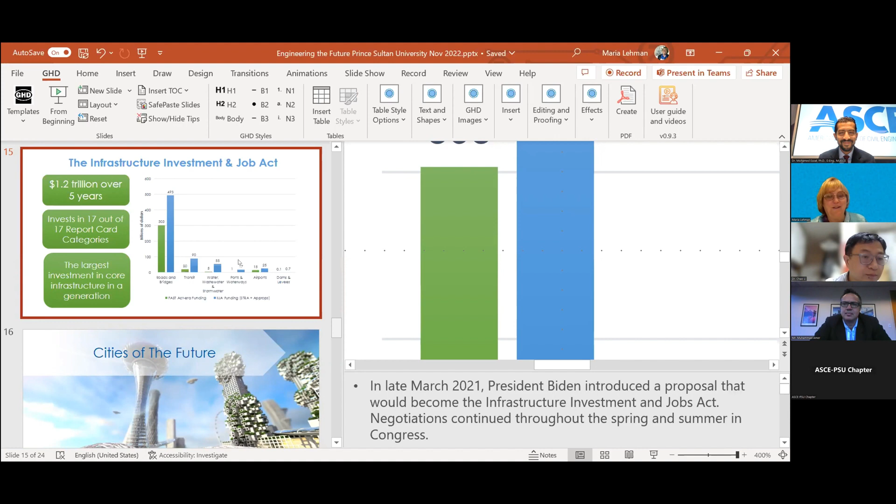So we're very proud of that, but we have to deliver. Now we have to deliver. We've been complaining about not enough money. Now we have to make sure we do the right things.

So part of our future world vision, just like we did with Building Big, Dream Big, a few years back, we are doing the same kind of rollout as far as going to science museums. And this is something that has global potential as well. So we signed an agreement with the same company that helped us when we did Dream Big, and I laugh and call this Dream Bigger.

We're taking everything we're doing with Future World Vision and embedding it into a full-length IMAX feature film, along with hands-on activities for middle school students worldwide to participate in. You can find Dream Big on social media, and you can even watch it on the plane with Alaska Airlines, for example. It's not just about outreach and Future World Vision; it's also about getting students already in programs excited about the future. But it's also for practitioners like us to have a community of practice where we can question and have an open dialogue about how we might handle issues in the future.

We're underway now, still in beta. This will be available at our convention in Chicago next October, finalized as a platform for Mega City, as well as the IMAX movie for next year. We're really excited, but you can download it now and use it as a tool. We've actually done curricular activities around it for undergraduate civil engineering.

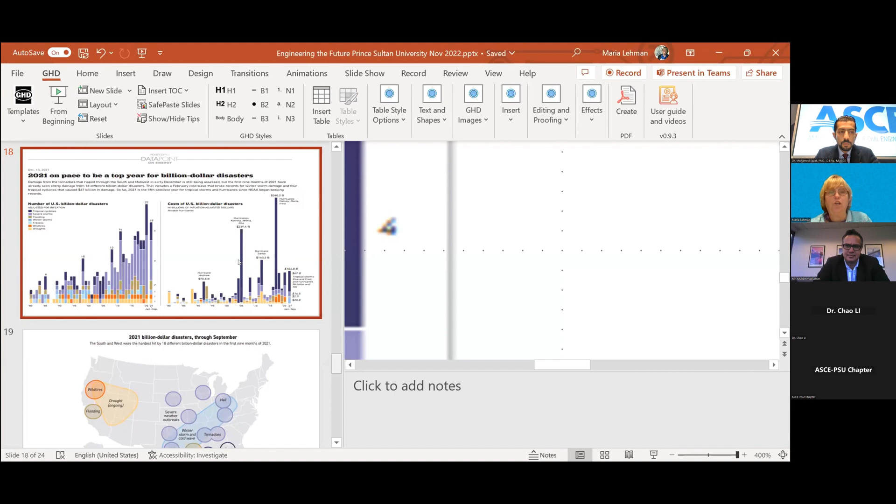We talked about the bipartisan infrastructure law and climate change, so we have to have both internal and external communications. Just to give you an idea, looking at the U.S. model last December, we had 22 separate events that each caused more than $1 billion worth of damage in the United States, and 2020 before that was the record. This year alone, Hurricane Ian, which hit Florida, is anticipated to cost somewhere between $40 and $60 billion. We're talking huge numbers, and we have to do better.

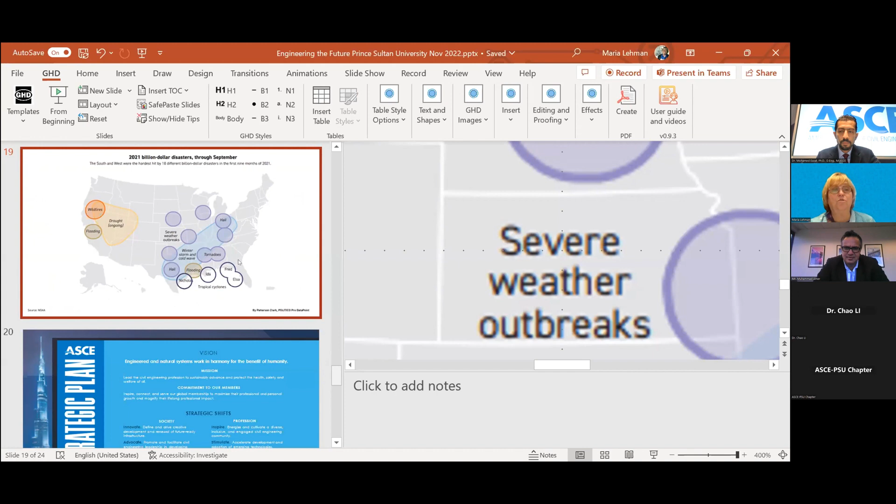This is kind of where the disasters were and the types—everything from too much water to severe drought depending on where you are. We're seeing flooding, wildfire issues, tornadoes. Looking at all these changes, I'm very proud that we charged a subcommittee of our Strategic Advisory Committee to work on a new 5-year strategic plan, because while our overall vision and mission was close to what we needed, everything changed from a strategy and tactics standpoint. We now have two pages on our website, very simple, about what we expect to do in the next 5 years.

Finally, a little bit about what we're doing on the public leadership side—I'm urging everyone to step it up. As mentioned, I'm on the National Infrastructure Advisory Council for the president regarding how we deliver better, faster, cheaper. The summit they had, just over a month ago, focused on being on time, on task, and on budget. We're looking at ideas from across the board on how to do things better, and it's been thrilling to have so many like-minded individuals who really want better, faster, cheaper engineering.

The last slide I want to leave you with: in Darwinian theory, it's not about the smartest or the strongest species, it's about who adapts best to the situation they're given. I think engineers are trained as problem solvers, so we're in a great place to lead on worldwide problems relative to society. We have to get comfortable with being uncomfortable. I think we're going to have questions at the end.

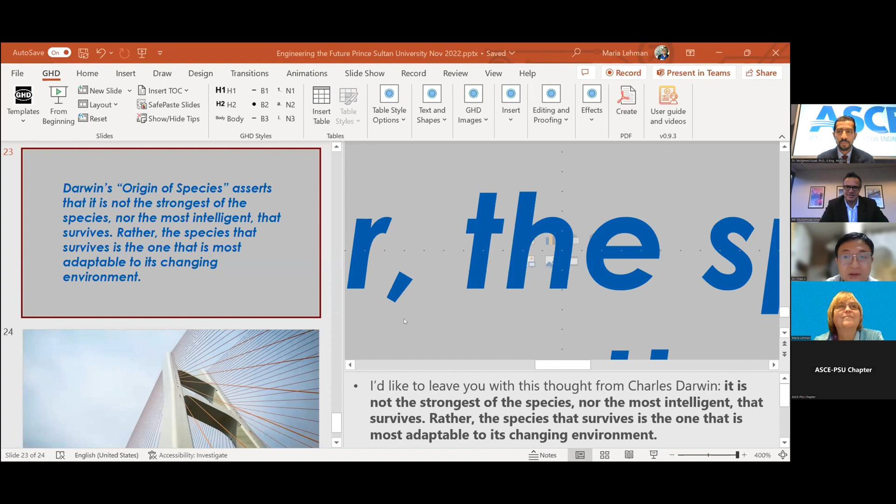Can you see it okay? Yes, full screen? Very well.

So my topic today is mostly about sustainability, but I want to echo what the president just said: we want a smarter solution, cheaper and more sustainable. Some people may think sustainability and resilience appear to be something extra, so I want to give our students, since we have a lot of students here, a bit of an example of what it means for a real large infrastructure project.

So here are some photos that I recently shot in Hong Kong and the neighboring region. You can see even in a very developed area like Hong Kong, civil engineers always have plenty of work to do. So if I start from left and go from top to bottom, you can see to the very left is...

Excavation, supported excavation - you have the struts and the sheet pile wall supporting the excavation. In the middle is roadworks near the center, very central in Hong Kong. And to the right is a renovation project for an old style cinema, covered by this green temporary works.

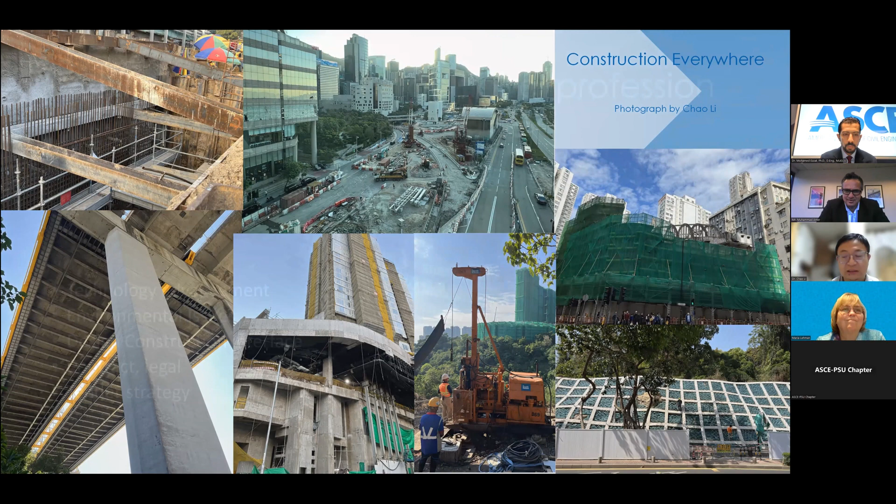So I just want to echo that civil engineers are always making positive contributions to society, no matter where you are.

And then one of the arguments I want to make is that civil engineering - at least when I was in university, more than 20 years ago - you always considered it as a traditional profession. Although in the past 20 years a lot of things have changed, especially the use of computer methods in civil engineering, in the last 10 years even more technology advancement has happened.

And we have ever more severe environmental problems, and a lot of constraints and limitations for all our projects. Also the interface issue between design and construction has become more and more severe. And as a contractor or as a designer, you've got to be aware of the contractual, commercial and legal issues.

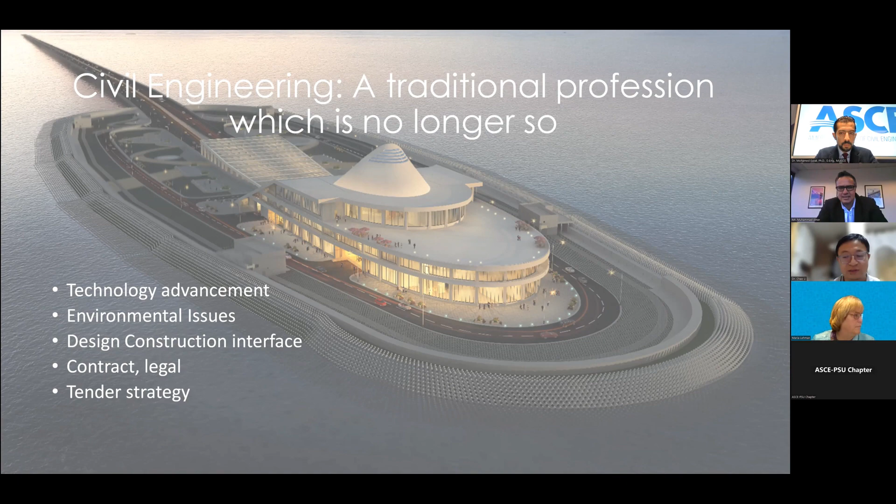And particularly in terms of tender, how the industry can overcome the lowest bid issue, which is causing a lot of problems for our industry - that's a problem almost everywhere.

So now let's take a step back and think about the characteristics of large scale infrastructure projects. I think one of the things is it is more than ever multidisciplinary. It has architects, civil engineers - including structural, geotech, transportation - environmental engineers, and MEP, which is mechanical, electrical, and plumbing. So in construction projects, all of these engineers work for civil engineers - basically we are the leaders.

And for large infrastructure projects, you also have many different work fronts, a lot of procedures, complex construction sequences. In terms of design and construction, sometimes you have to work in a very densely populated area - no longer in a place where nobody lives - many times you work with constraints. And of course for large projects you need a lot of people, a lot of plant, longer duration, and high uncertainty. So all this makes our jobs a lot more complex than before.

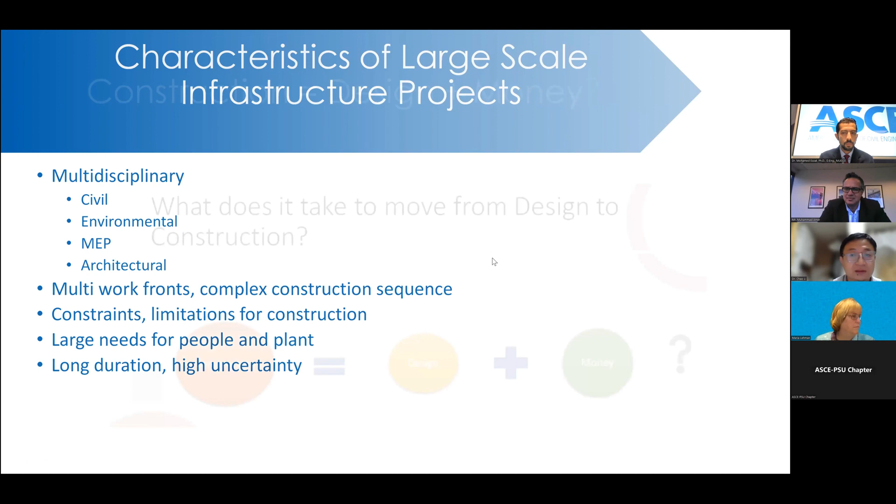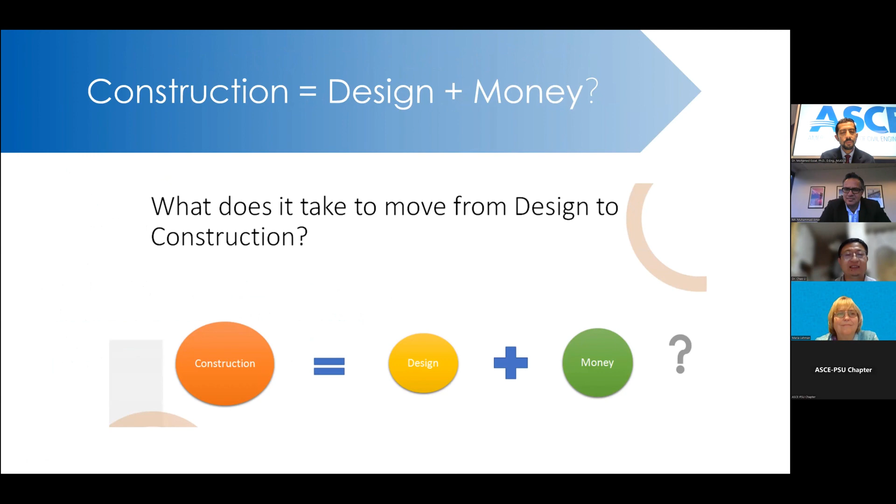One of the questions I want to ask our students is, what do you think, is this equation true? Is construction just design plus some cost, some funding? So let's reflect again about what is design and what is construction.

Design, most people know, means how the thing is supposed to look. We broadly divide design into permanent design and temporary works design. Permanent design means the final condition - it may or may not involve any contractor, there's a designer or consultant who finishes this permanent design. But temporary works design normally involves a lot of participation from the contractor, because the contractor has to figure out how to do it.

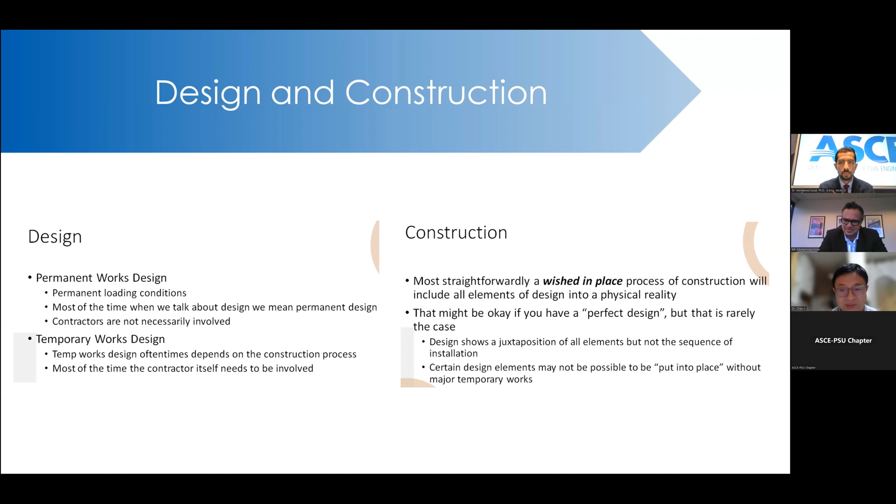Most straightforwardly, people would think construction is magically changing the design drawing into a three-dimensional reality. But that's rarely the case, even with a perfect design, because the design in the narrow sense simply shows a list of all the elements you want, but not the sequence. Many design elements cannot be put into place without major temporary works. For instance, if you want to build an arch dam, you can't just put a piece of the element there - you have to work it out with the soil, the rock, and the temporary works.

In terms of design optimization, if you've studied construction management, you've probably seen this chart. The horizontal axis is the project time, from the start to the finish of construction and into the start of operation. The vertical axis is the level of influence on cost. We can see that if you change the design at the very beginning, you have the greatest influence over the overall cost. But as time goes on, particularly after entering the construction stage, the level of influence is greatly reduced.

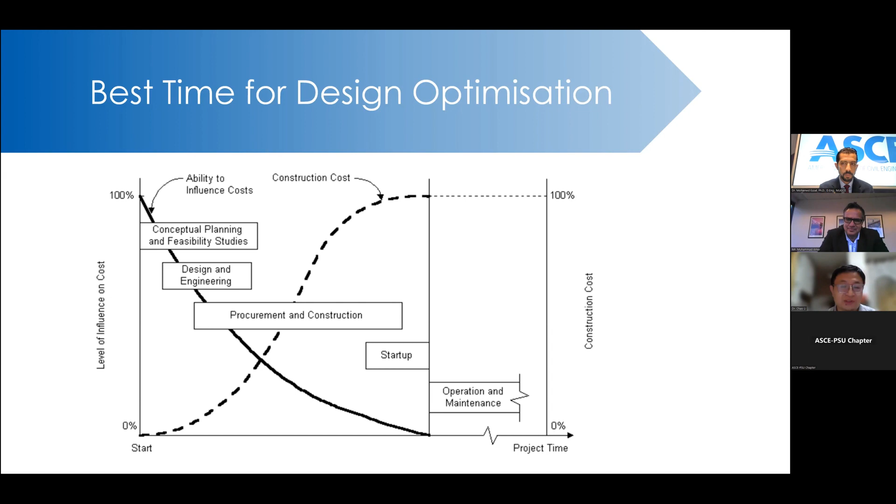Why is design optimization always possible? Why can't we do the job perfectly in the beginning? I want to bring a few perspectives. Firstly, from the geotechnical engineering part, we normally rely on ground investigation data. There's a lot of uncertainty - you normally have a small amount of ground data before you get the job. After you get the job, particularly for large infrastructure projects, you get like 10 times more data than before construction. So there's no reason why you shouldn't make use of that data and make your design better.

The third element I want to point out is monitoring data. Nowadays our construction site is a little bit like having a lot of eyes watching the site. We're collecting a lot of information on water pressure, movement, and the response of the partially complete structure under loading. All this data can be used for further optimization.

How can we do it? For instance, in geotechnical engineering, it's possible to use big data technology to deal with the data, which we can show with an example a bit later. In the structural part, for wind load, earthquake load, and wave loadings, you can have more advanced analysis during the construction stage based on more information. Construction itself is a dynamic process, so you can do some further optimization.

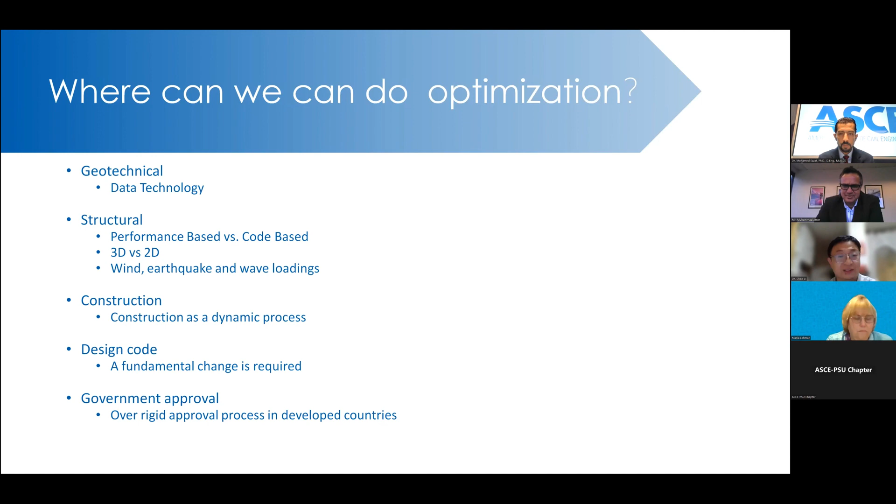At last, I want to mention the design code, which needs fundamental change to suit the current digital revolution - digital construction. The government approval process can also be further optimized. Here's one example: when I started working in 2003, in New York, I saw one of the engineers use this simple one-page calculation for a subway station.

Well, you can see it's a very neat calculation. Right now, not a lot of engineers are still familiar with this. Nowadays, many of these calculations can be done by finite element software more accurately, but we would still need this hand calculation to calibrate our computer simulation.

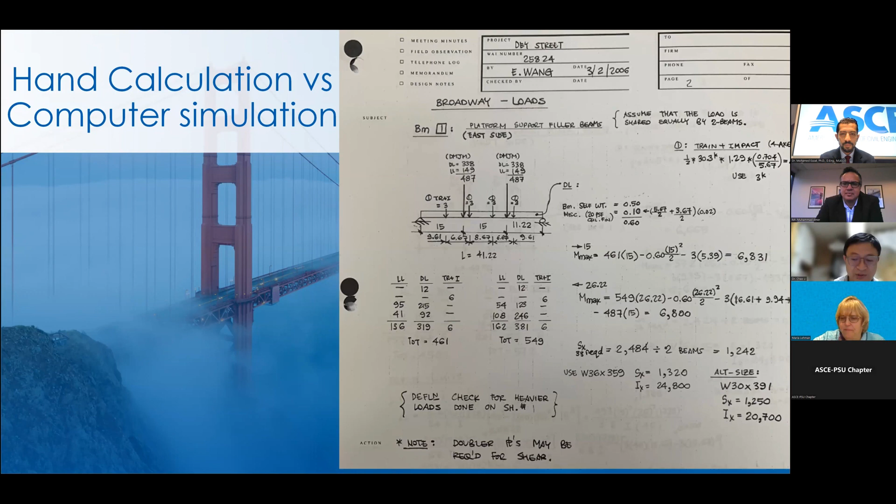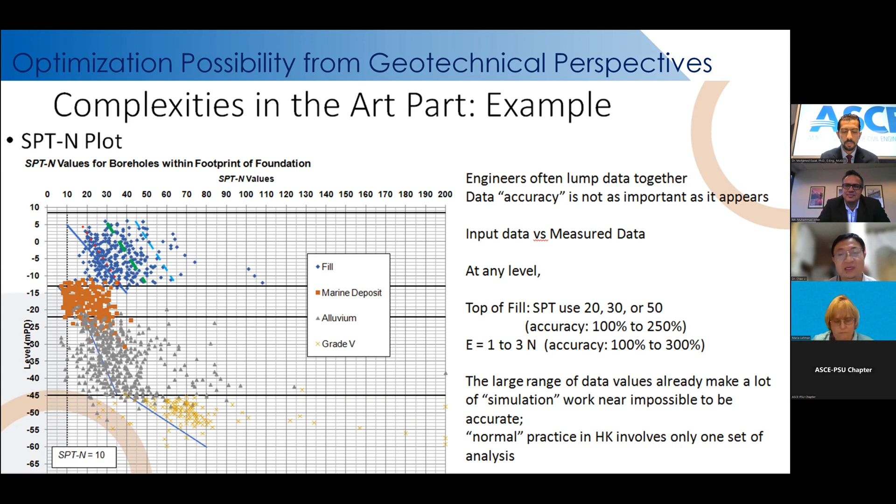But at this moment, even in Hong Kong, a very developed area, people still use one single set of analysis to do the design. You can see this is why the design can be optimized - a lot of uncertainties are involved.

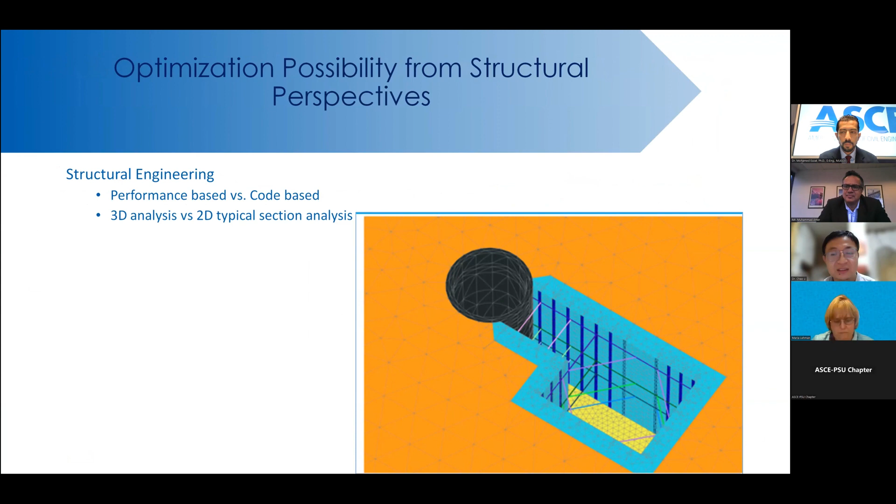In terms of the structural mechanics part, this shows the excavation lateral support. We have a circular shaft and the ERS to the right. For this kind of geometry, if you still just do 2-dimensional analysis, you're going to be quite conservative, because if you fully consider the 3-dimensional interaction between soil and structure, you can have on average about 20% to 30% savings.

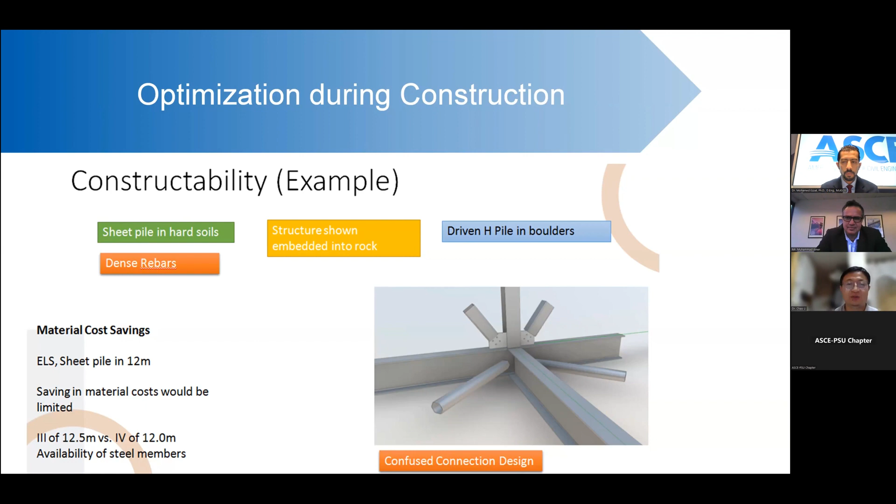There are a number of other things - for instance, people may choose the wrong type of structure for the soil conditions. If you assume there's hard soil, you would use a pre-bored pile, but if you instead use a driven H pile, on paper you'd save money, but in reality, if you encounter a boulder, you still need to bore through it and then install the driven H pile, which will cost more than the socket H pile or bore pile. So all these things you cannot know basically before construction starts.

The third point, another point, is the building code. In some areas of the world, the engineer normally says, okay, I'm doing the design based on the code, but actually the code has a lot of options, whether ASCE code or Euro code. If you are willing to do more sophisticated analysis for cost saving, you can - by spending a little bit more on analysis, you can probably save a lot of money in terms of overall cost.

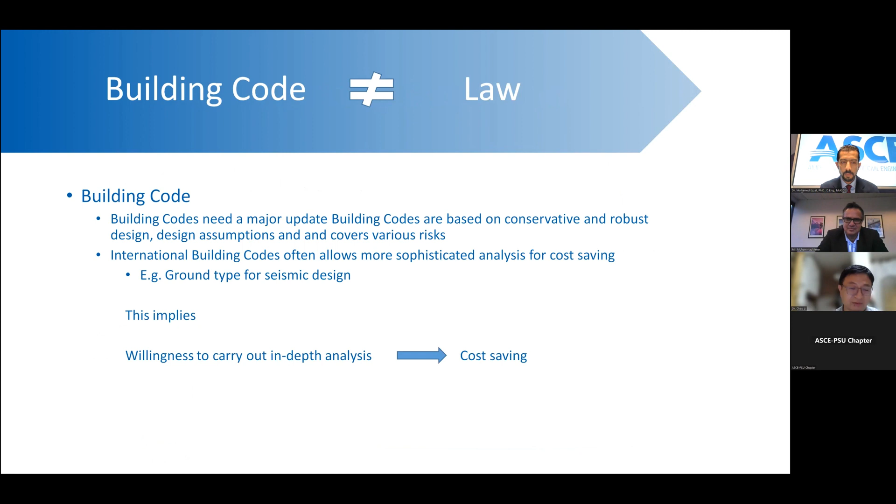So the design approval is one big issue as well. In Hong Kong, we have a very rigid design approval system. Even a method not allowed by the authority, even if it's a sound practice, probably cannot get approval. And the approval itself takes a lot of time.

Basically, as we're region 10, I'm from region 10, which covers a lot of countries with a lot of governments, so different codes are used. We need to be aware that design approval in one country doesn't mean approval in another. So we need to be careful about that.

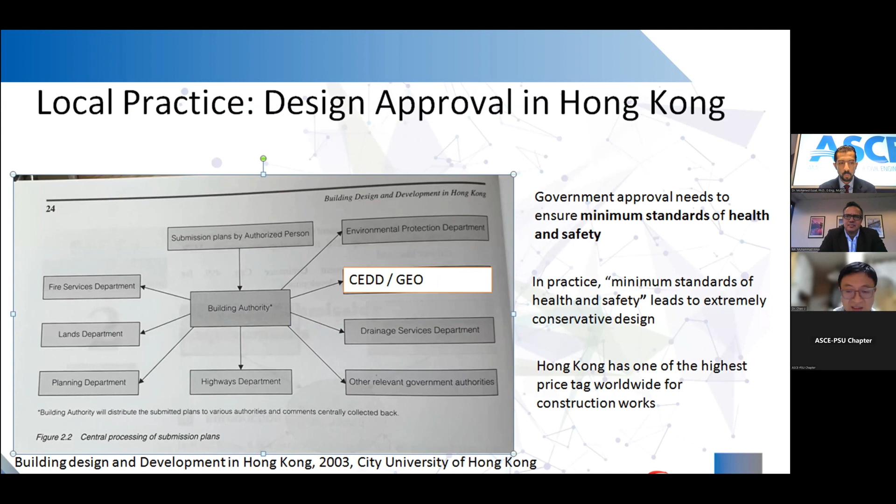In Hong Kong, we have a building authority which collects all the different departments, like the fire service department, the highway department. All these departments come under the umbrella of the building authority, which does the design approval. You can see that's why they are executing these laws rather than letting the engineer decide many of the design elements. That's one of the problems why Hong Kong is very expensive in terms of construction cost, which is not very sustainable.

Overall, how should we design? Think about sustainability and resilience in relation to design. I think we've got to look at the overall life cycle, and we should try to reuse as much construction material and plant as possible, which I'll give an example of on construction material, and then think about how we can do carbon reduction.

One of the important things is people, because we need people who are in charge of design, construction, and management. All these people need to work together to ensure common understanding is reached, to avoid waste during the design or construction phase.

New technology will help with that, including particularly building information modeling. At this moment it's pretty much still a graphical tool, but the potential is there, and many important infrastructure projects have already used BIM to reduce waste. We can also use Internet of Things, robotics—all of this will help us reach our sustainability goal.

One example: recently in Hong Kong we completed one of the major reclamation works of the Hong Kong International Airport. We reclaimed about 650 hectares of land.

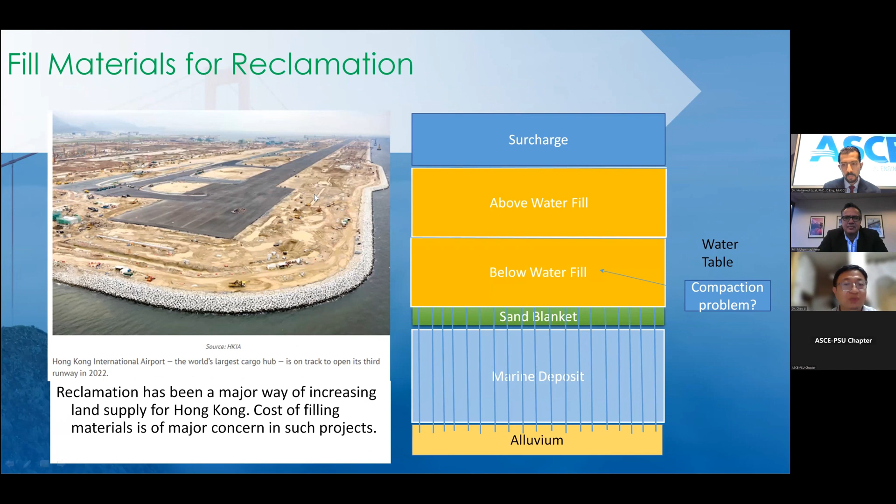A further enhancement would be, if you go back to the picture, we have a runway, and only the runway is very strict in terms of settlement performance. So if the designer and contractor can work together to make sure the settlement is controlled within the runway, for the rest of the area you don't need a very strict settlement criteria. If you can do that, you save a lot more money and make the whole thing more sustainable.

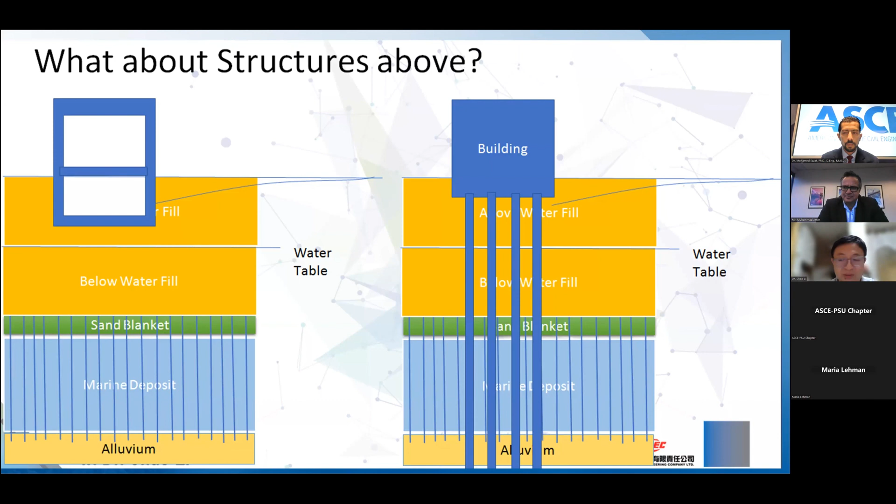Time is very limited, so in terms of the superstructure it will be similar. You can build a building and put it on piles, or you can work out the stress balance. So if you build a very large basement, your building probably will not cause additional settlement. This is a little bit too complex to explore at this moment.

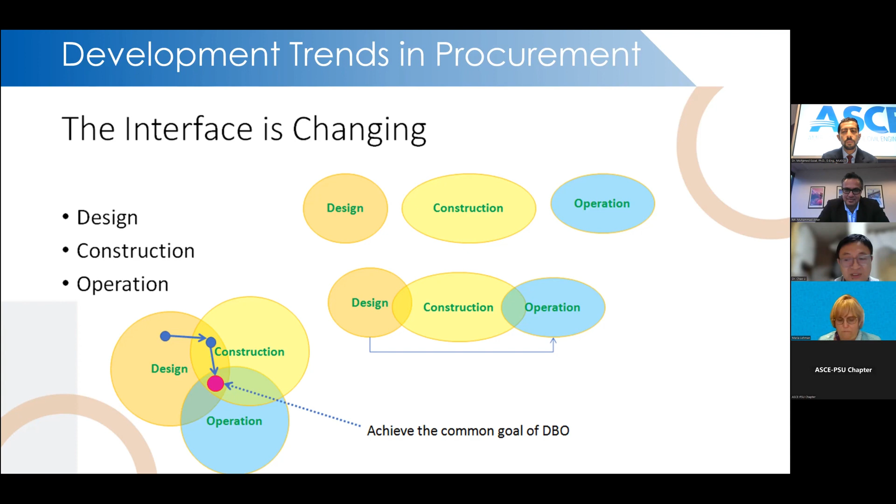But we need to know that the interface is changing. Before, we had design, construction, and operation very separated. Right now, design and construction have some interface, construction and operation have some interface. In the future, or probably the future is happening now, we need to find the optimal region where design, construction, and operation find a common goal. Only if we enter this region can we call our infrastructure sustainable or a cheaper solution.

So we'll move on with the slides. As I just mentioned, how do engineers get ready? I think we need to think about having the right vision, the open mindset, the willingness for collaboration, and the necessary skills. Most importantly, we need to have understanding and leadership.

ASCE is promoting the view of civil engineers as the right leaders. During real construction projects, all of the engineers are working for civil engineers. Normally, at least in Hong Kong, the civil engineer will lead the electrical engineer, mechanical engineer, and all the other engineers work together with civil engineers. So that's why we need to be in the leadership role.

There are a number of huge infrastructure projects in the Greater China region. I'll just mention the names, I cannot explore all the details, but if you are interested you can find out a little bit more. This is the Three Gorges Dam project, and this is the Hong Kong-Zhuhai-Macau Bridge Link project.

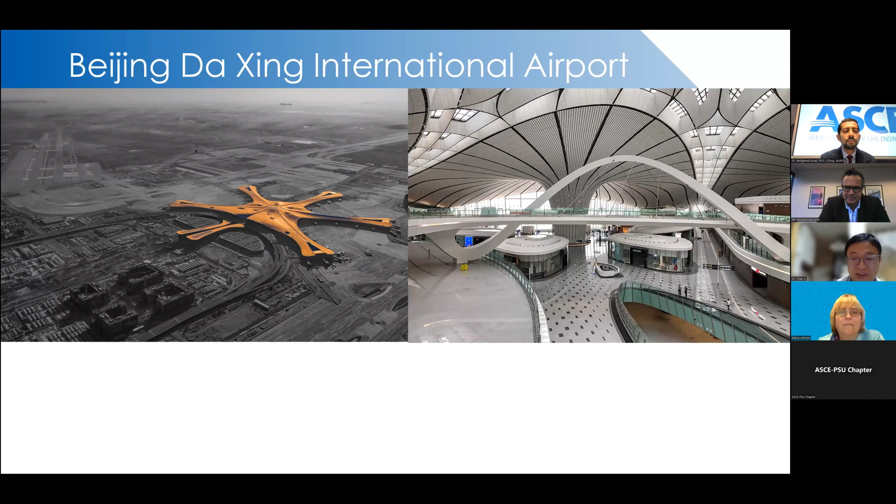This reclamation project, I was the design manager for this project. We reclaimed about 650 hectares of land. This is in Beijing, the new airport, the Daxing International Airport. And there is another, more than 35 kilometers long, the Shenzhen-Zhongshan Bridge, which consists of a bridge, immersed tube tunnel, and a man-made island. All fascinating projects, if you're interested you can find out a little bit more.

Finally, a few words about Region 10. Region 10 is actually another word for ASCE Global or ASCE International. We have presence in 24 countries in Asia, Europe, Latin America, Middle East, Australia, New Zealand.

And that's the mission already explained by Maria. ASCE has a vision for the engineer to be master builders and stewards of the environment, innovators, and managers of risk and uncertainty. Most importantly, it should be an invaluable network for lasting friendship. Thank you very much for your attention. I wish to build this greener future together with you by innovation.

Thank you so much, Dr. Chae Li, very nice presentation. I really like the manual calculation sheet. Actually, I still use manual calculation and always advise my students to double check the result using manual calculation. Thank you so much for presenting those very interesting case studies.

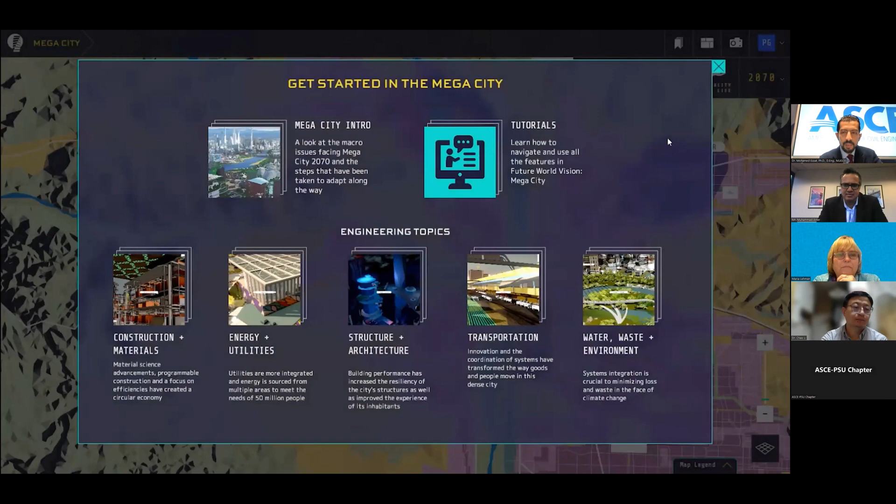After logging in and moving past the tours and tutorials screen, you'll be in the city view, where you will see a wide map of the city and the surrounding region. A comprehensive story of Mega City appears on the left. To see the map evolve over time, navigate to the year selector on the right and click through the other eras.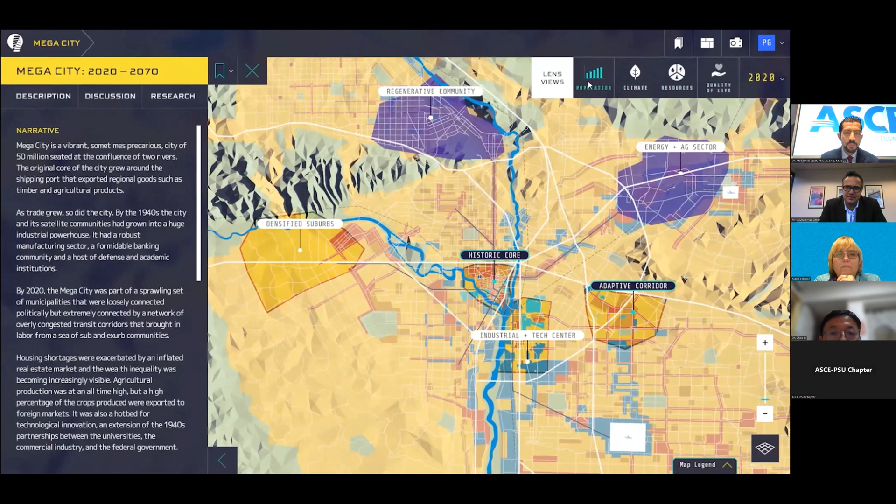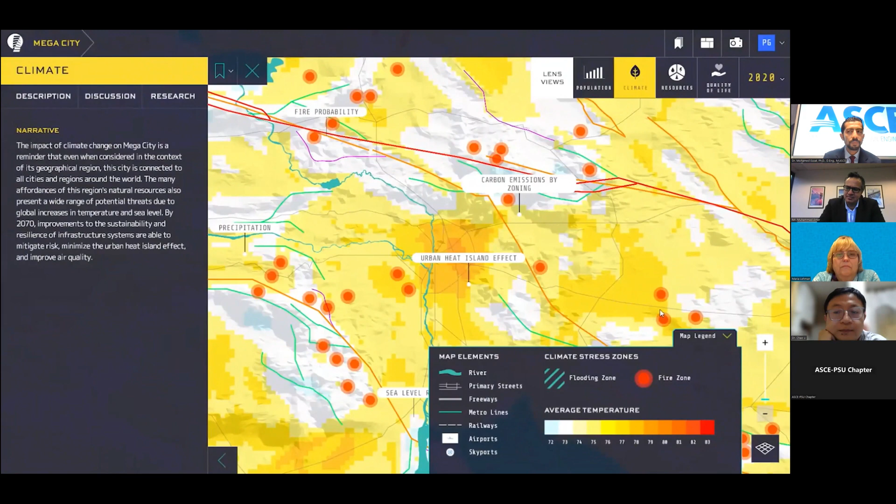An important feature of this view is the ability to see the city through several macro lenses. Clicking these allows you to isolate specific regional realities that shape the challenges and guide the innovations in Mega City. Refer to the legends to understand these lens layers, study the data that informs them, and read a brief overview of each. When you're ready to move on, you'll see that 6 distinct districts are selectable. Click these to read about how they differ.

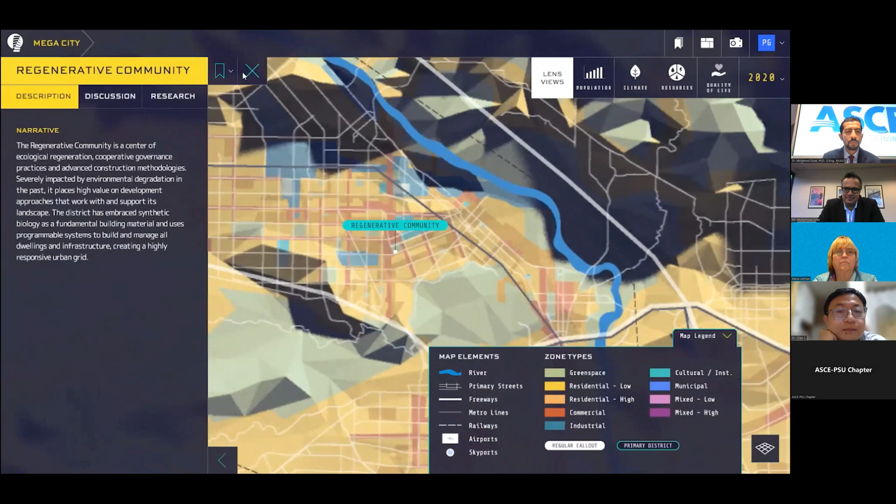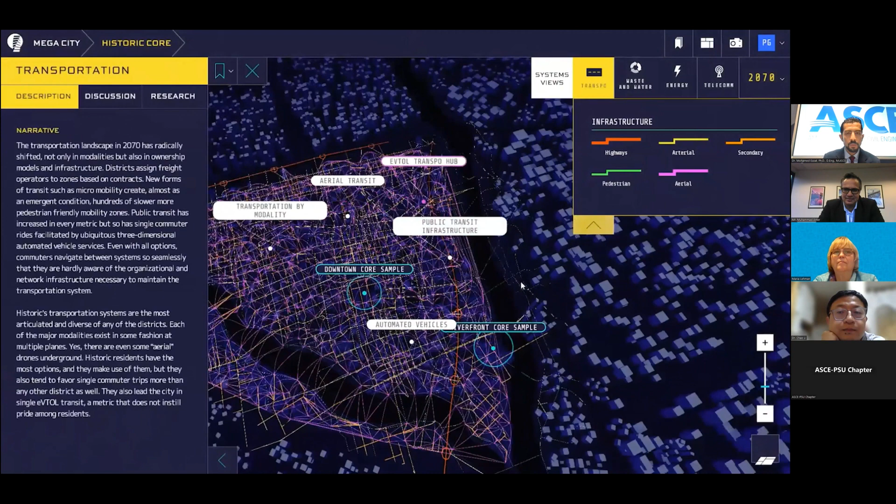2 of the 6 districts are more fully explorable. When you're ready to go deeper, click on either Historic Core or Adaptive Corridor, and those will lead you to those districts. Once the district view is loaded, you'll have several options to explore. First, the lens buttons have now been replaced by systems buttons, and this is the place to understand the systems of the city. Clicking through each, you'll see a new legend appear.

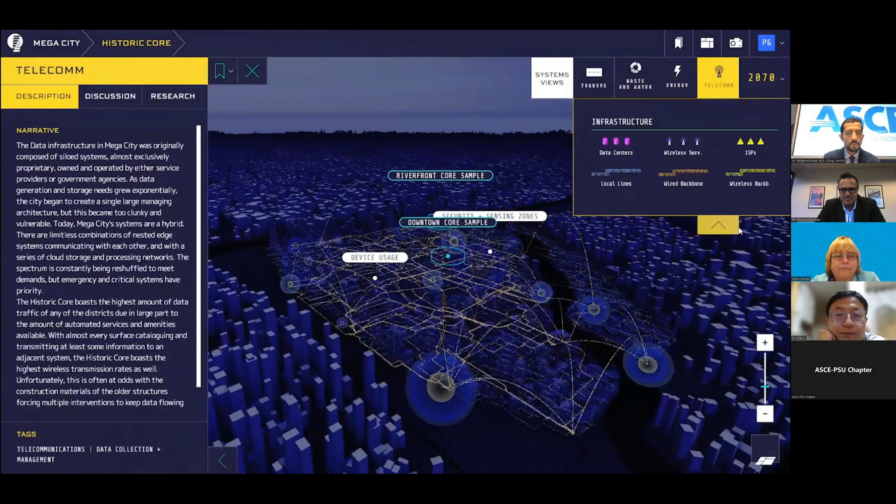An overview accompanies actual data driven by the population density, demographics, and energy and resource requirements of this particular district. Also in the district view are key landmarks crucial to understanding the wider functioning of the district and city as a whole. Rolling over the callout flags extruding from the landscape will display the name of that particular landmark. Click to explore them in more detail. Let's look at the energy substation. You can move in closer and read the summary of the landmark's function.

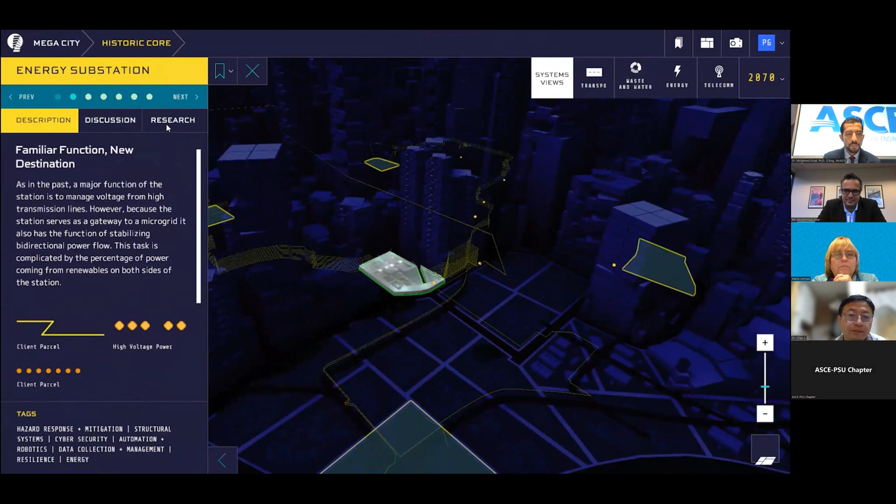Then you can click through the steps that illustrate the process in more detail while seeing the landmark animate to further clarify. When you're ready to leave this landmark, X out and you'll return to the district.

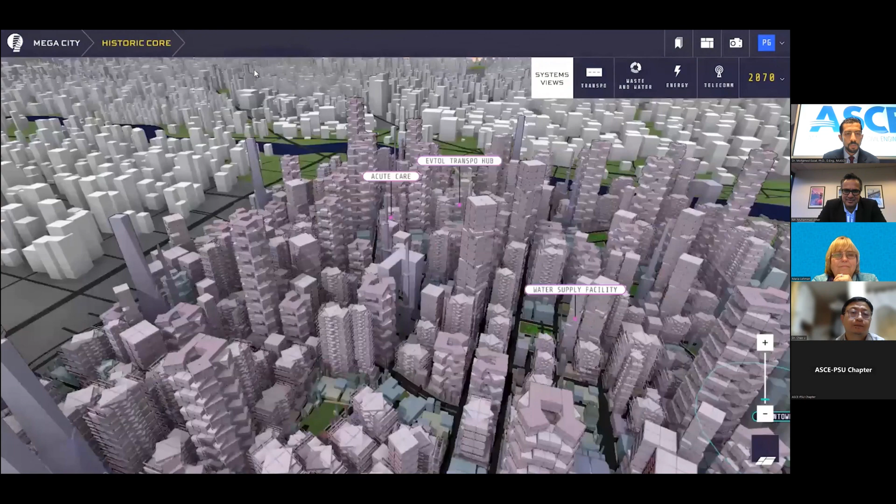The next thing to see here is what is called a core sample, indicated with the explorable dark callout flag. Think of this as a detailed cross-section, or a vertical slice of a few key city blocks. Upon selecting it, you'll notice that it's segmented into 4 distinct vertical layers. Selecting each, you can read the summary on the left and then click specific callout flags within those layers to take a closer look.

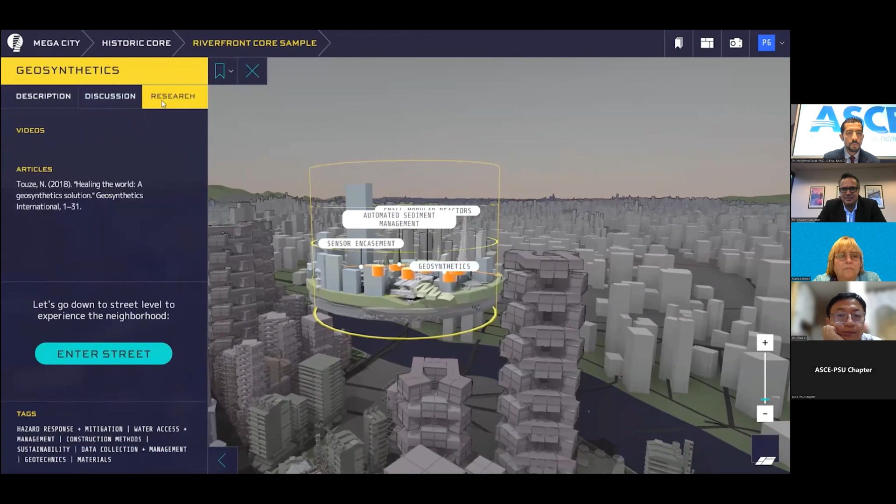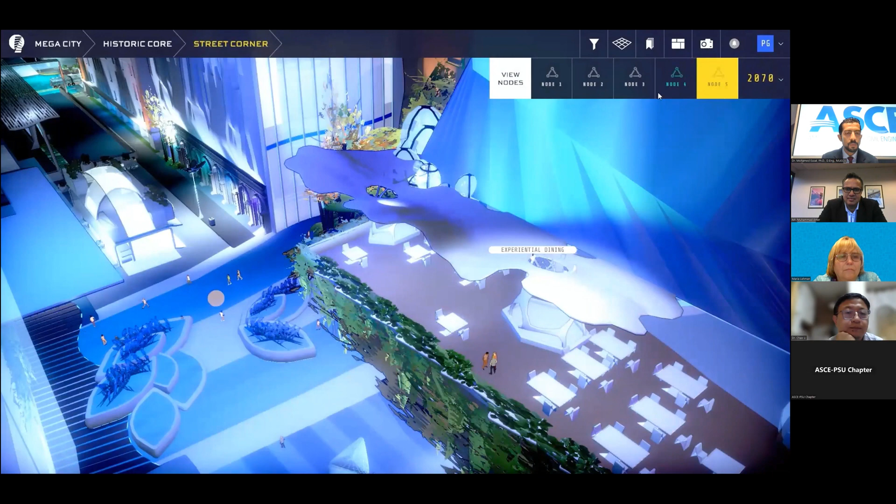When you're ready to move on, click Enter Street in the lower left portion of the text window. There will be a brief load as all of the elements of the street corner populate. Once they do, you'll find yourself seeing the city at a human scale, the streets bustling with activity. Using the various navigation methods - and for more on this, watch the Navigating Mega City tutorial video - you can wander or fly around the street corner. You can click any callout flag that interests you and zip to that spot.

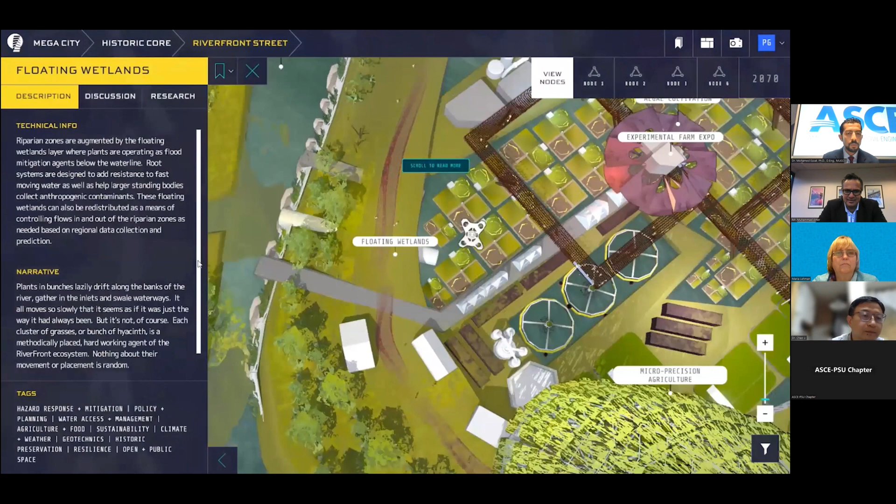Here you'll see 3 tabs. On the left, you can read the technical info to understand the engineering logic or explanation for this particular callout. Then read the narrative description, which explains how this item might impact residents in their day-to-day lives. The middle tab, Discussion, allows you to add your thoughts to the conversation, which in turn might spark colleagues to add theirs. Previous comments appear below, and you can reply to those as well.

Note that you'll have a choice to post your comments to all users, which is the default, or if you are a member of a private group, you can select that group from the drop-down menu here to keep your comment private. The rightmost tab is the Research tab.

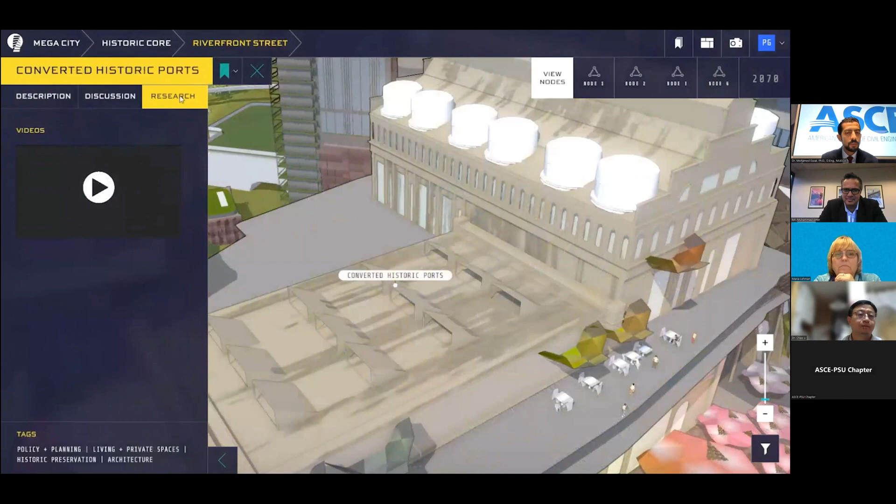Open this to find the research that informed or inspired the callout. It may be in the form of a video clip from an expert interview or citations for research articles. Bookmark the callouts you want to remember so they will appear in your library, making them easy to find later. When you finish with the callout, simply click X to close it and continue on your way.

Finally, there is a filter button you can use if you're only interested in seeing callout flags within a certain theme. You can find this button in the lower right corner. When you click it, a filter screen will appear with a few dozen keywords. Clicking the breadcrumbs or arrow-shaped banners at the top left of the application will help you jump back to any level you'd like to go, and you can continue your exploration from there.

One thing I would mention is, as you saw, this is a vast city. It is easy once you get into it - it is easy to get lost in the city. So the latest version that we have now available for download, you can actually enter the city and search for what you're looking for. So for example, if I'm only interested in highway pavements, or I'm only interested in architectural facades of the future, I would go and search for that.

And it will give me a list of every place where this is mentioned. And when you click on that, it'll take you straight to that point in the city. So you won't have to search for it within the city. Do check it out, do look at it, but let's very quickly - and I'll wrap it up very shortly. I know we are short on time.

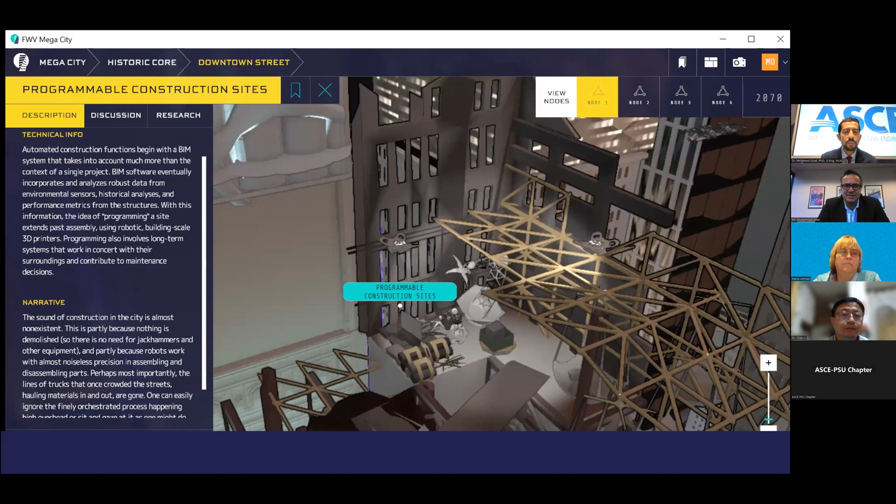The application - I'll start with application in academia. How do we educate civil engineers of the future, right? I'll take a screenshot of the desktop platform where I'm showing the programmable construction sites. Using that as an example, I know this is about sustainability and resilience - you could take any of the sustainability related elements and make that the focus. This is the slide, let's take that.

And here is a sample exercise 1. I'm not going to read through all of that, but just to say, this is an instruction to the faculty member: show a callout during a class and have an in-class discussion. So now the students are not using the platform - they're just sitting back and having an in-class discussion about the advantage and disadvantage of this idea.

In this case, it's programmable construction sites. Overall, good or bad idea, and the reasons why. Focus on the social, economic, and environmental impact of that particular idea. And that generates a discussion, and you see the characteristics of this activity.

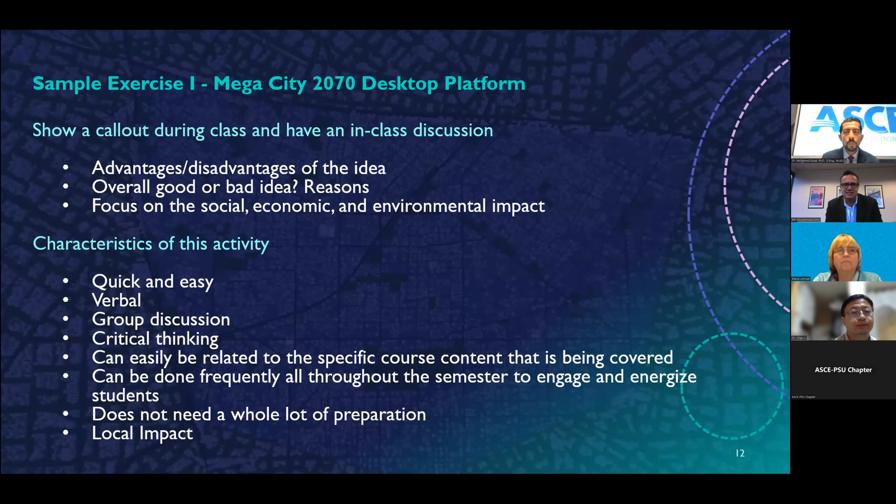It's easy and quick to put together, and it generates stimulation in the classroom. But in sample exercise 2, you're requiring students to actually get into the platform and provide a homework assignment for which students engage in a discussion on a particular callout using the discussion board of the platform.

As you saw in the demo, every product, technology, or process in the city has its research and other information, but also has its own discussion tab where you can have students engage in discussions around the advantages and disadvantages of that idea. The great thing is it has a global impact because everyone on the platform gets to see that, and you can have in-platform and off-platform conversations from it.

Sample exercise 3: ask students to pick a few callouts, 3 or 5. When I say callouts, it's one of those tags—process, technology, or product—ideally related to each other and relevant to the course content. Ask them to perform thorough research, news and research articles, to write a term paper and develop a class presentation, identifying current research on the ideas presented and discussing the feasibility of those ideas happening in 50 years. So you see that's much more in-depth—it's a critique and a term paper on what you're assigned from within the platform.

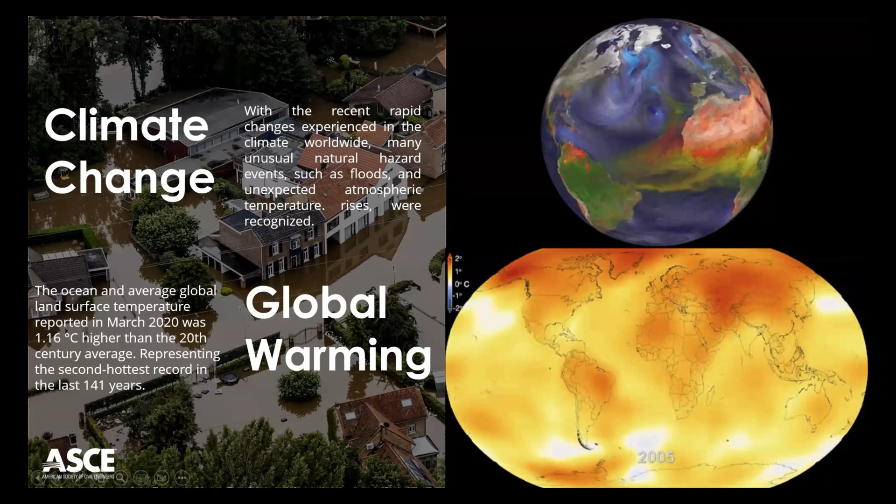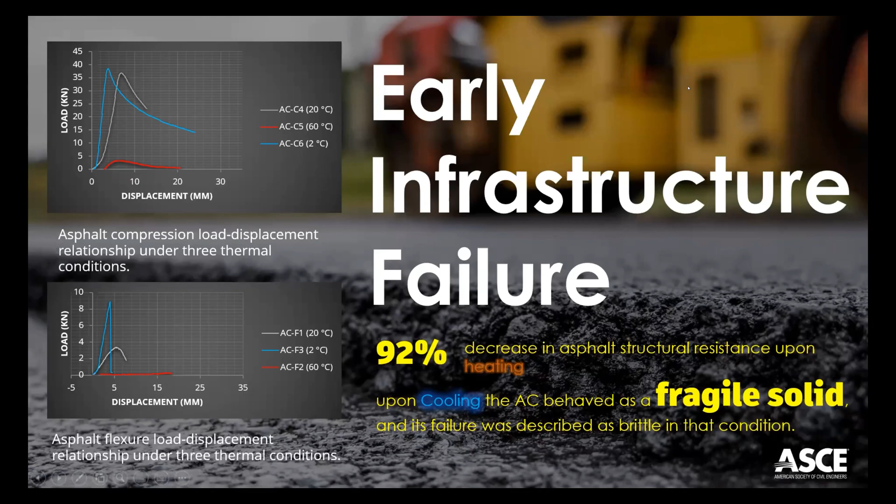According to our testing in our engineering lab, we examined the asphalt behavior under extreme hot conditions and extreme cold conditions, and what we found is that it loses up to 92% of its structural resistance upon heating, and upon cooling it's converted to be fragile and suffers brittle failure. For sure you experience one of those cracks nowadays, becoming more and more common in every roadway. Many types of cracks, damage, settlement and different kinds of cracks.

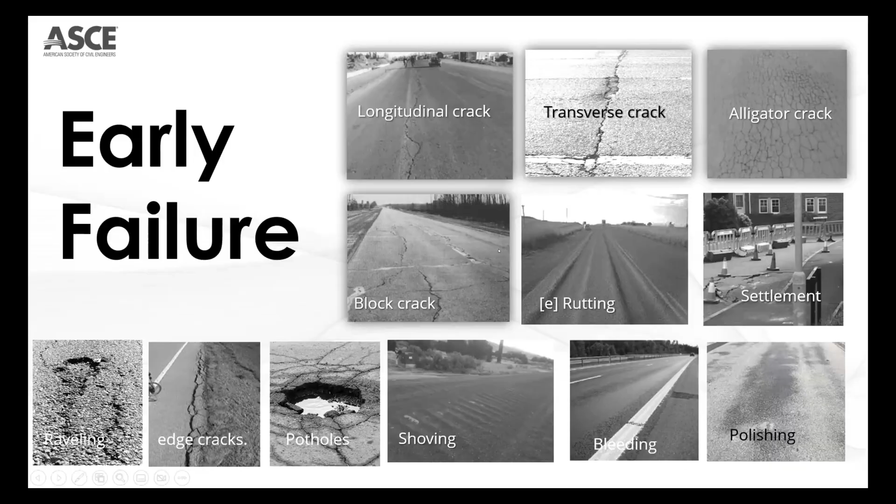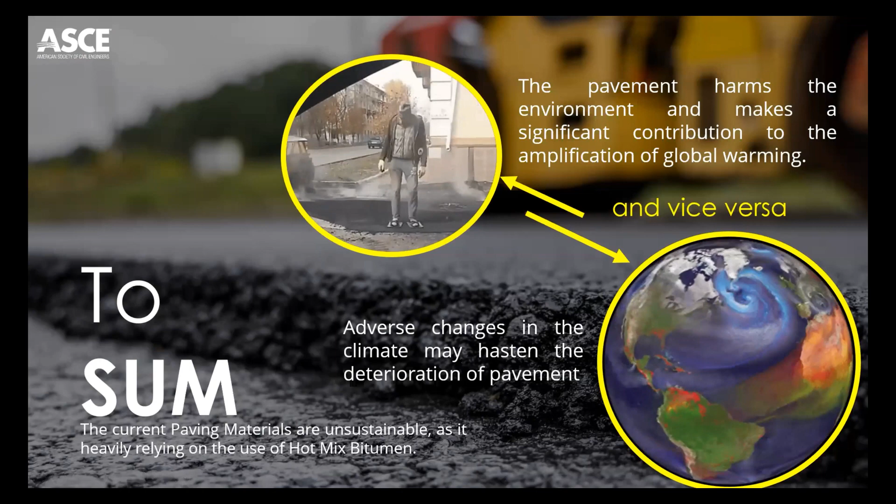On the other hand, the asphalt pavement is also contributing to global warming. Many studies show that it releases up to 300% more emissions upon being subjected to solar radiation. So to cut it short, asphalt pavement contributes to global warming and climate change, and vice versa, climate change affects and deteriorates our asphalt pavement, which is the major element in most paved and covered areas.

So what eco-friendly paving solution do we have for the near future? I will present here the solution that is very close to being applied much more widely.

First, one of the most promising solutions we have now is the bio-based asphalt pavement. This type of asphalt is mainly made of non-petroleum-based renewable resources. Most of those materials are bio-based, and it can be colored, which can reduce the temperature of the road surface and reduce the urban heat island effect.

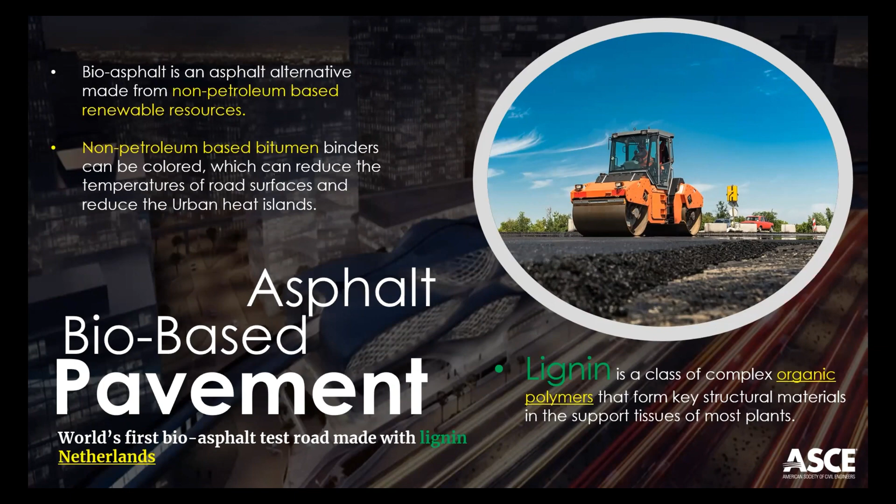In Netherlands, they already applied a full-scale experiment on one roadway segment. It was composed of lignin material, which is an organic polymer material.

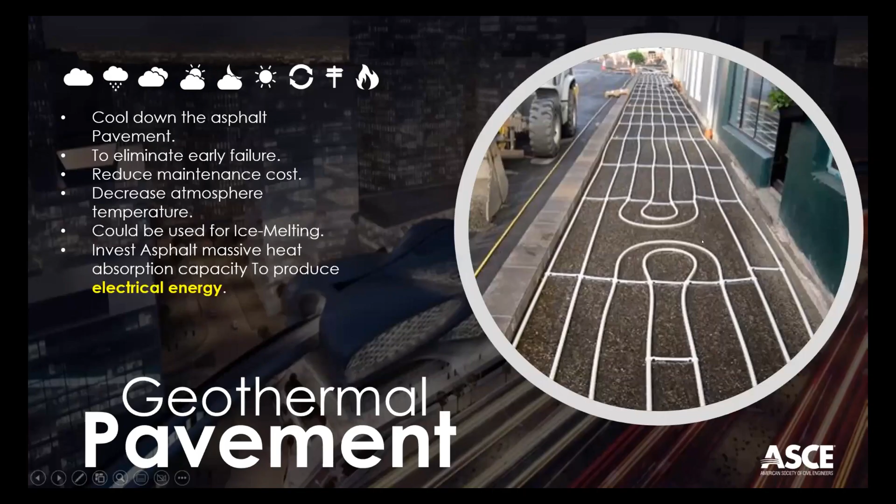Next is the geothermal pavement, which integrates geothermal pipes composed of polymer material or copper material. Those pipes transfer the heat absorbed from the asphalt into the underground subgrade layers, exchanging the absorbed heat into a much cooler layer under the asphalt. This solution could also help in cooling down the asphalt pavement, eliminate early failure, reduce maintenance cost, and could be used also for ice melting.

Most recent researchers proved that investing the asphalt's massive heat absorption capacity to produce electricity or electrical energy could be applicable in this system.

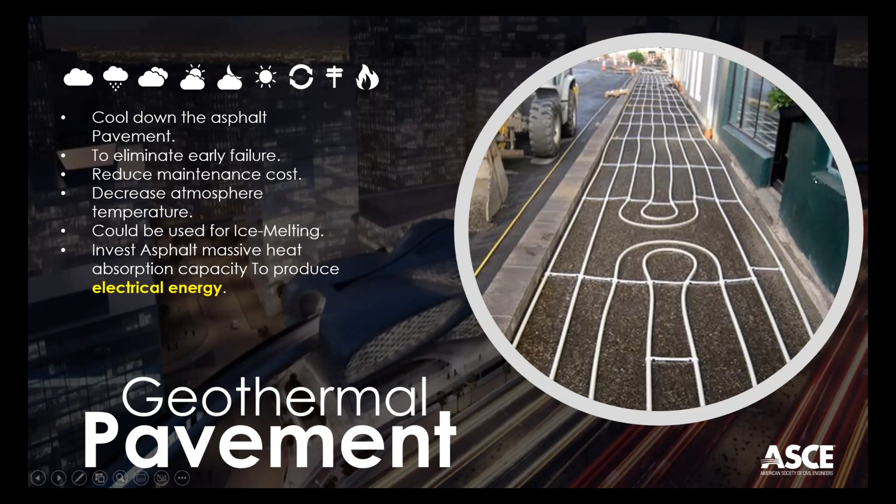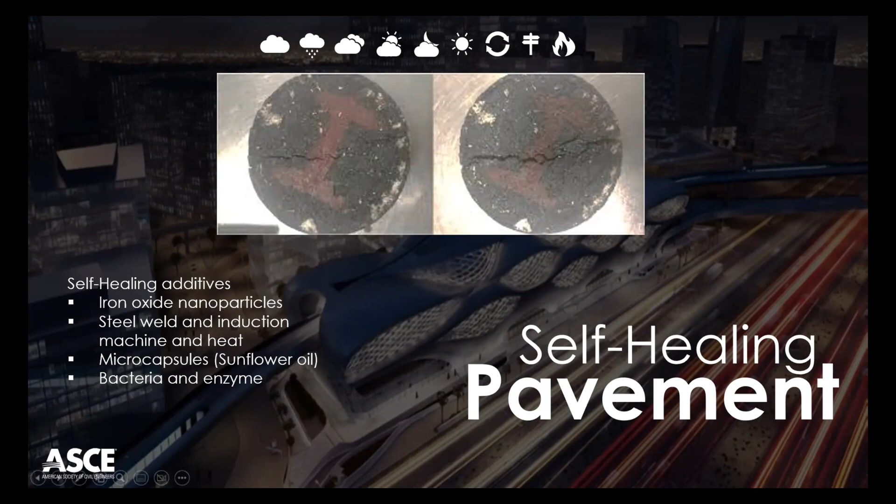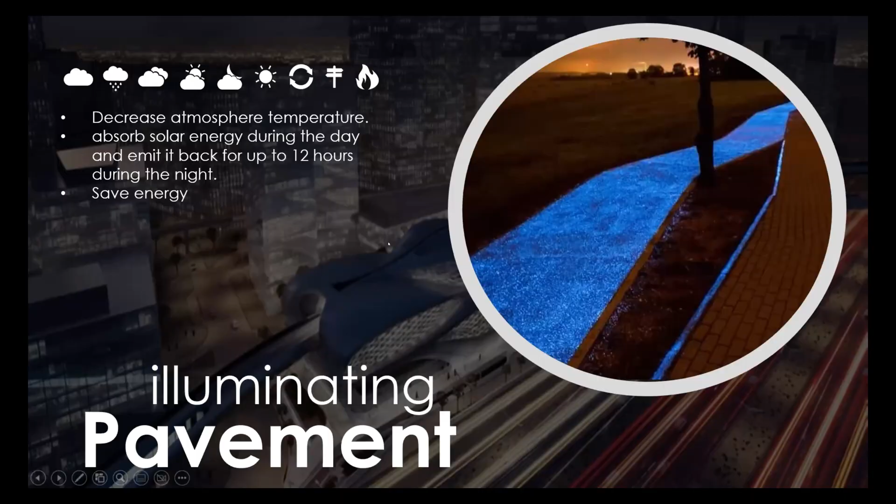One of the most important issues we should look for in our pavement is that it connects not just our transportation network, but in the near future, it can also connect people. Most of the recent studies talk about generating energy through the pavement. So through the Internet of Things and the most promising new technology, pavement in the near future may be used in connecting people themselves.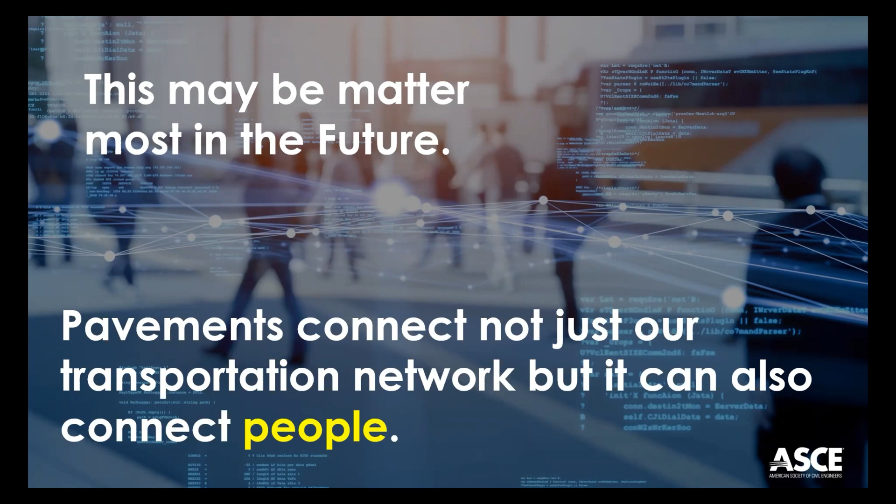Since we are talking about new technology, I made a very exciting experiment. I used one of the AI applications that works on image processing. I included all the keywords I presented here today - solar pavement, bio-based materials, geothermal application, and different solutions - and I fed the AI model with those keywords. I asked it to imagine the look of pavement in our near future. And here is the result.